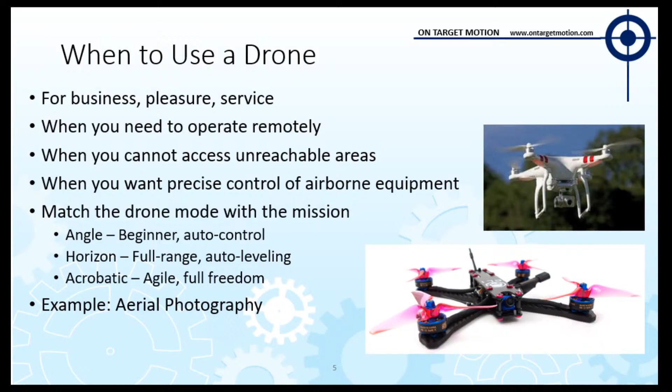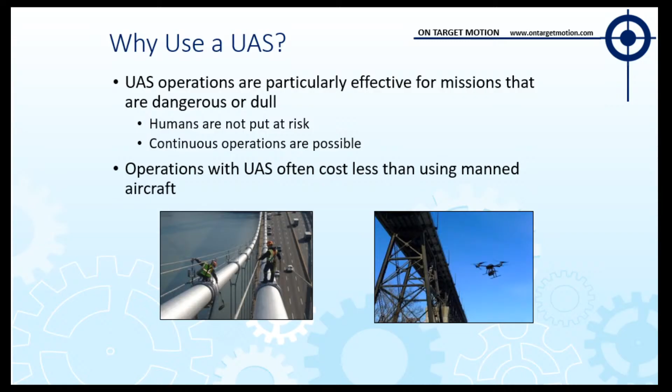So what's inside of an unmanned system? So you'll hear these called drones. You'll hear them called UAVs, or unmanned air vehicles, UASs, which is unmanned air system. Generally, it should be called a UAS. This is a UAV, but to operate it, you need the whole UAS, because you need the system. But what do you need to operate a UAV?

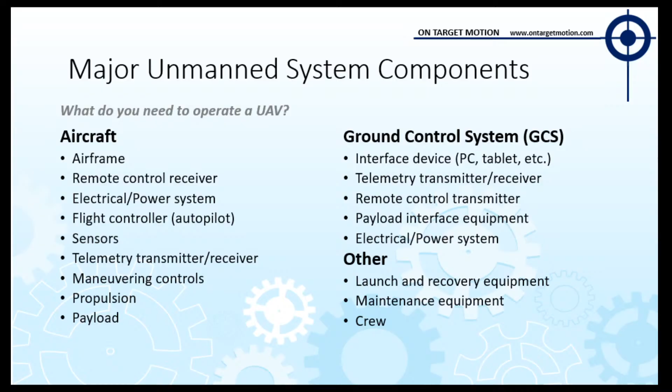Well, you need an airframe, which is this big X frame here. You need a remote control receiver, which is generally these things. I'm sorry, they're the transmitters. The transmitters, the receivers are on the aircraft. The receiver is built into here. I don't even have it on here. The one going around has another piece coming out of here. You need an electrical power system. That's a battery sitting on there.

You need sensors. This guy has ultrasonic sensors on it. Some of them have LiDAR. Some of them have radar even. You need telemetry. If you were out there flying with me, you saw that you could read on the phone the altitude you're at, how far away you are, things like that. The battery voltage, that's telemetry. You need a way to maneuver your controls. Typically, it's with these joysticks.

You need a propulsion system. Usually, that's motors and propellers. Often, you have a payload. In this case, it's the cameras. You need a ground control system. That's usually one of these radios. And on that radio, you'll have some sort of visual system. So the one I was flying, I had an iPhone connected here to give me a visual of what was going on. You have your telemetry, you have your remote control transmitter, things like that. So lots of equipment is needed just to fly this system.

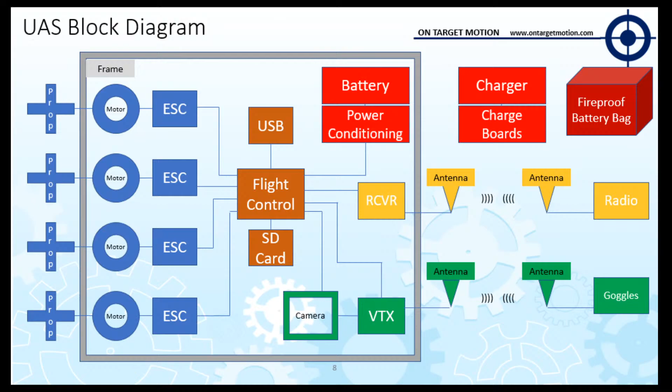In this case, you put these on, and you could fly kind of VR, flying your drone. So you have goggles and such. So that's great. That's good.

So when you're building these drones and you're looking at how to select the one you're using, the mission profile matters, and the payload matters. The payload is really what you're using it for. What's the payload of this drone?

Who can guess what I mean? It's a camera, right? The mission of this drone is to take pictures. So the payload of what it carries around is a camera. Sometimes a payload might be some infrared sensor or a heat sensor or something. There are border security drones that fly around and look for heat signatures because there could be somebody hiding somewhere. Or an Amazon package could be.

And for those that were in our light and laser program, we talked about infrared sensors and how they use it, so there are companies that will go to buildings and say, okay, facilities manager, you've got a leak in this area, and that's a great use of that. Yep. So whatever your payload is, whatever your mission profile is, where you're going to use it, will determine the kind of drone you're using.

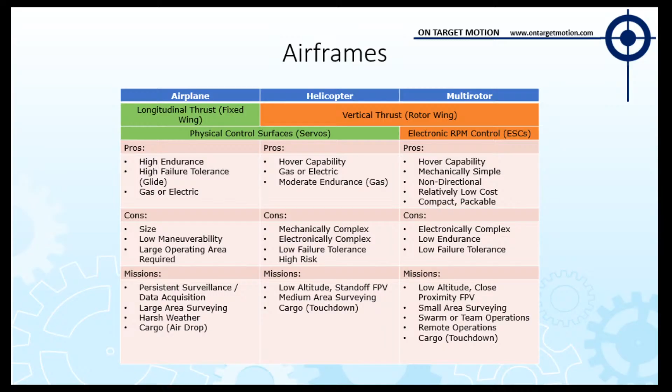Although people are using UAVs, winged UAVs that are like airplanes, to do scanning operations. So you can do a glide camera move as well. So they all have their pros and cons. You pick the airframe that suits you. And then you pick the payload that suits you. Now, there's a whole variety of different cameras you could have there. You can see the kind of features that people care about nowadays. You do need it to be stabilized.

Somebody made a comment out there when we were flying. They picked this up and they moved this around and they said, hey, the camera moves when I do this. And it does, because this camera is on a gimbal. So if you look carefully, it can move in 3 directions. That's because it wants to be level to take the picture, and if the drone moves like this, it has to stay level. So the gimbal has to be able to move the camera in 3D space.

So lots of different configurations. Somebody mentioned the Amazon drone. It doesn't look like this anymore. They have a couple different varieties. I've actually worked with Amazon on it. Let me ask you this. What do you think is the biggest challenge with Amazon delivering packages via drone? Close. It's actually people stealing the drone. If you're going to buy a $12 pack of whatever you're buying on Amazon, but you have a $13,000 drone delivering it, right? They're worried, how do you protect the drones?

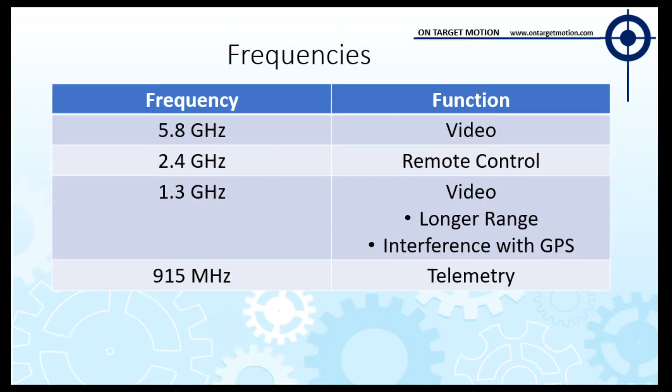Well, the frequencies are chosen based on the bandwidth of the data you're sending. So video has a lot of data, so you need a very high frequency to send that much data that fast. Whereas telemetry is very little data. It's just bits and bytes. You can send that on a very slow frequency. And they're spread out so that you could run all those radio signals at the same time. So these are some of the tools you would use to run it.

These toy drones come with kind of toy remote controls. We have a whole bunch of those. We actually ran a kids workshop with these. We found out that kids are pretty rough on those. We burned a bunch of them. This is a setup we use for the Build-A-Drone program. That's why I have this Taranis radio. This is from that Build-A-Drone program. That's from our drone operator course. That's these Phantoms and the radios that come with that. And then the Mavics are for our application courses. So we've been running with that as well.

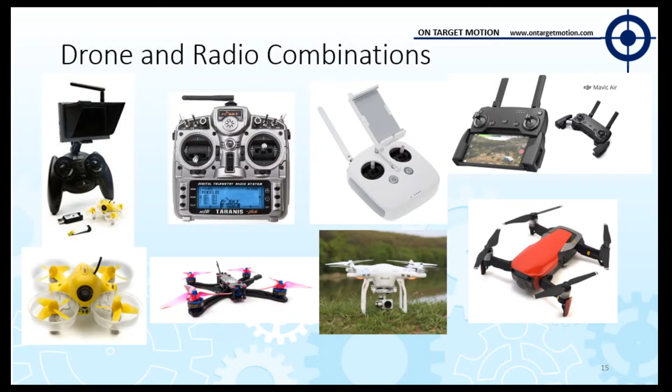Now these remote control systems, that's your connection to the aircraft. So it consists of the transmitter and the receiver that's on the aircraft. The green one still going around somewhere? Oh, it's right here. You guys all saw this? Okay. So it kind of looks like a bug with these antennas, so it's often hard to see. But this is actually the back of it. The camera's the front, right? Because that's what you're out there doing.

But this has a couple of different transceivers on it, right? This one is for your video, and this one's for your remote control and your telemetry. So a couple of different transmitters and receivers on it. This is a transmitter because it sends the data to you. This is a receiver, but it's also a transceiver because it needs to send the telemetry back to you.

There's multiple channels on it because if you had a bunch of guys out there on a drone field running, you don't want to step on each other. So these radios generally have ways to change your channels, and you can program these to do all kinds of different things. This looks like old technology compared to some of these, right? But this radio is phenomenal. This can do everything you'd ever want. You could program it to set up for different drones. I could set this up for this drone and tune this drone different than that one, and then pick the different drones I want to use. This is an amazing piece of equipment.

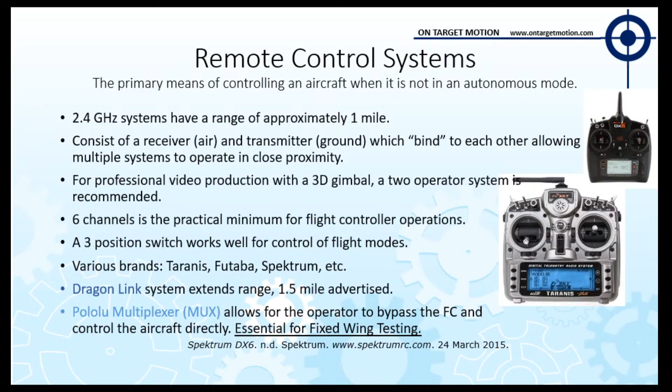When it comes to batteries, I use these LiPo batteries. Everybody generally has their own kind they like for each drone. They're generally proprietary for these commercial drones. So this is a DJI battery. And if you look at a commercial drone, about a third of the cost is the drone, about a third of the cost is the camera, and about a third of the cost is the battery. The battery is a very expensive component because they know you're going to buy a bunch of them. And generally, battery technology is pretty expensive. But these guys right here are just commercial batteries you can buy for a couple bucks. So these are the ones I use on these builder drones.

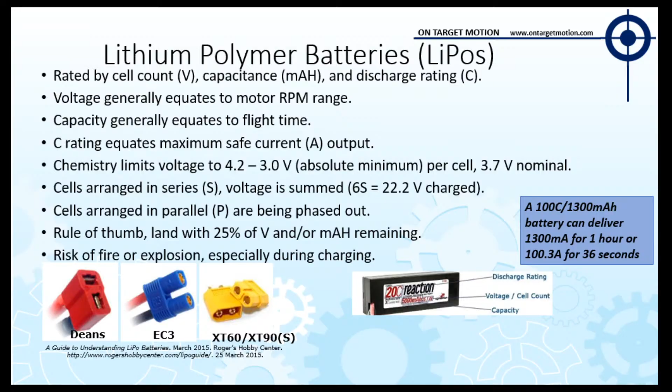The funny thing is, these ones don't get much flight time. I probably get about 5 minutes of flight out of this drone with this battery, whereas this guy I get about 20 minutes of flight. I also fly this one a lot rougher, so that's part of it. But a lot of it depends on the chemistry and the stack up of the battery. So you can see some of that detail there. When it comes to the motors, different motors give you different performance. These are brushed motors.

These are brushless motors. A lot of that depends on the kind of drive you want to use, but you select the motor for the multi-copter you're using. So there are two drivers for the size of the motor. One of them is the weight of the aircraft, because as you can see here, the thrust you need to get out of a motor depends on the weight of the aircraft, some safety factor you put in for it, and then the number of motors you have. Not everybody has 4 motors, some have more or less.

But then the other thing is how fast do you need it to accelerate. So these motors are actually pretty strong relative to this one. This Mavic has these little tiny dinky motors, whereas this one has these bulkier motors because I want more power out of this one. This is a racing drone, so I need a lot of acceleration.

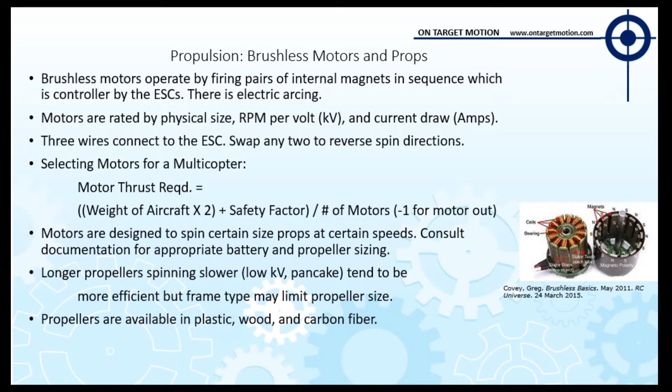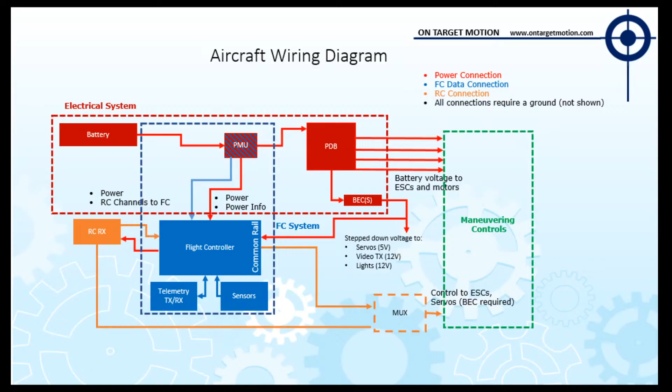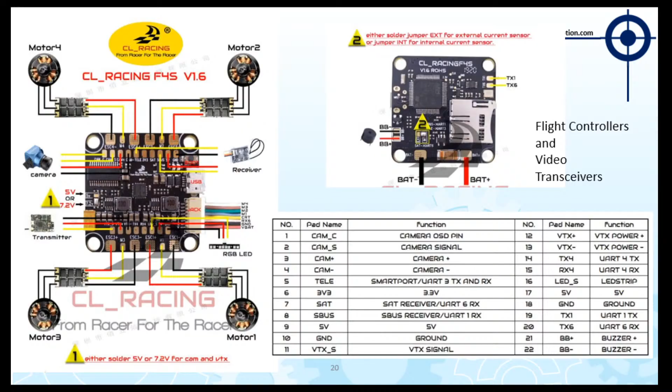These are the actual parts that we put into these builder drones: the flight controller and the video transceiver. And you can see there's a good number of wires, but not overwhelming. On the flight control, most of the wires go out to these ESCs and then to the motor. So we just solder them up. 3 wires there, tape the ESC down, 3 wires out to the motor. Piece of cake to put those together, but that's kind of how we build those racing drones.

Now when you get to the camera, there's a couple of choices you could have. Generally we use these little tiny board level cameras that you see right here because they're cheap and they're good for FPV. You kind of keep them at a fixed location. But when you get on these commercial drones, you're investing pretty heavily in that camera because that's what this drone does, right? The purpose of this drone living is to take pictures. So you invest in getting a real good camera there. So you could use GoPros, you could use bulk cameras like that.

But what I want to show here is, if you want to walk into Best Buy, where would you go to find a drone? You'd go to the camera section. Because they don't call this a toy, right? They call this a camera that flies. It's not a drone that has a camera. It's a camera that flies. So most of these electronic stores treat them as cameras because it is the most important part of what you have. I mentioned the gimbal and some other challenges with cameras there.

And when you tie these into a first-person view system, you need a video switch to go from your display to your goggles if you're running with goggles. And this is an old set of goggles. Most goggles now don't have this big box on the end of it. They're real compact. But you'd put antennas on it here. I don't have the antennas on it, but these are your user interfaces. You press the buttons you need to tune into the right channel.

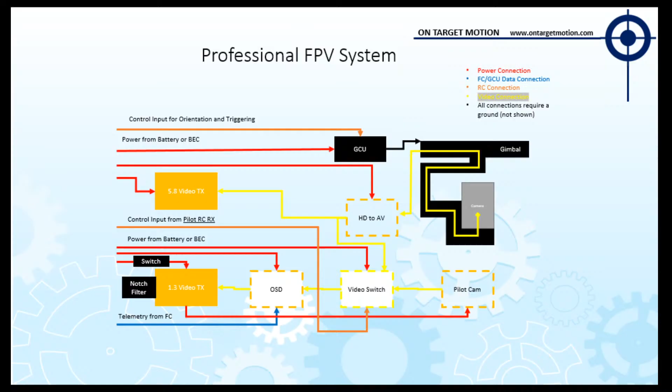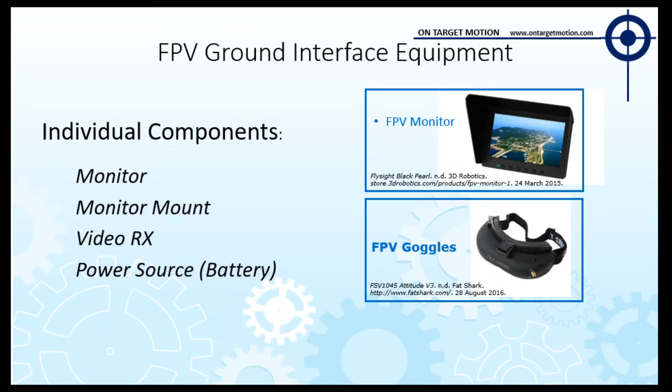By the way, if you were to fly with goggles, by regulation you still need somebody to have visual line of sight on the drone. You can't fly goggles alone by rule. So there's some FPV goggles. The other thing a lot of people do is they take an FPV monitor, which I was using with my phone. Sometimes put a shade around it to keep the glare off. But that's how you'd have your visual interface.

So let me talk about some flight dynamics here. You saw these drones going around. If you were to pick up a control like this, some of these I showed out there, this is a mode 2 control. So your left stick has two functions. It is your elevation. You push up or down as your throttle up or down. That's going to raise and lower the drone. And then the yaw is left and right on the left stick, and that's going to turn it.

So you would take your drone, and if I push the left stick up, the drone does this. I push it down, it does this. I push it left, it turns this way. Push it right, it turns this way. On the right stick, you can see it has your pitch up and down and your roll left and right.

So if I pitch it up, it's going to actually go backwards because it's going to pitch this way and go this way. If I pitch it down, which is pushing the stick up, it's going to go forward. And rolling, roll left or roll right. So the right stick is how you move it along the horizontal plane, right? And your left stick is how you move it along the vertical plane. Make sense?

So let me ask you this. This is where it gets a little funky. How does the drone move left, right, forward, or back? By tipping? How do you tip a drone? Because remember, the only thing you have as a pilot is this, right? I have a couple of joysticks, that's it.

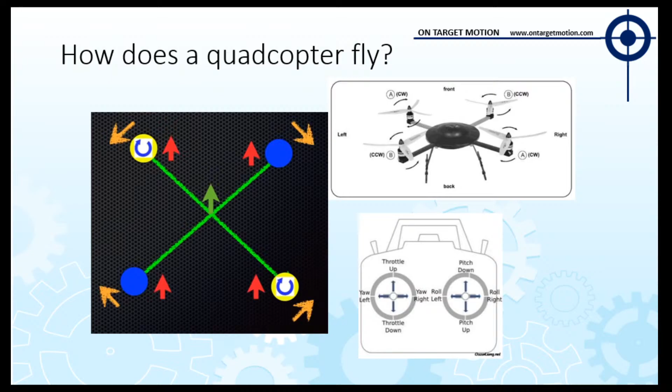So the flight control, we talked a lot about the flight controller.

How am I doing on time, Drew? What time is it? Okay.

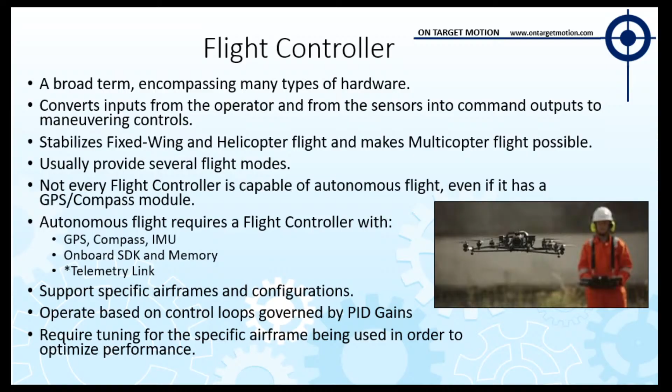All right, so when we get to flight controllers, there's the way you tune a drone. The most fun part of these drones is tuning them. When you build this, the first time you power it up, it's going to crash on you. I tell everybody that when we build them, because I don't want them to get upset. But the first time you fly it, it's going to crash. And the reason is you haven't tuned the flight controller.

The flight controller doesn't know the weight of the aircraft, and that's going to change depending on the kind of batteries you choose, depending on all these design choices you made. It doesn't know, I mean, you've got to tune the angle of your camera. This camera right here is too loose. I need to tighten that.

Or else you won't be able to see where it's going, because when this flies forward, it's going to be tilted. So I needed to tilt that up. If it was tilted down here, you're going to see the ground. You're not going to see where you're going.

But the flight control doesn't know the weight of everything. It doesn't know the performance of each motor. So it doesn't know how fast it should be spinning all these things to do what you want. So in a flight controller, we call it a PID controller. And there are gains that we adjust so that when you give it a commanded state, it's going to read the sensors of where it is, determine an offset.

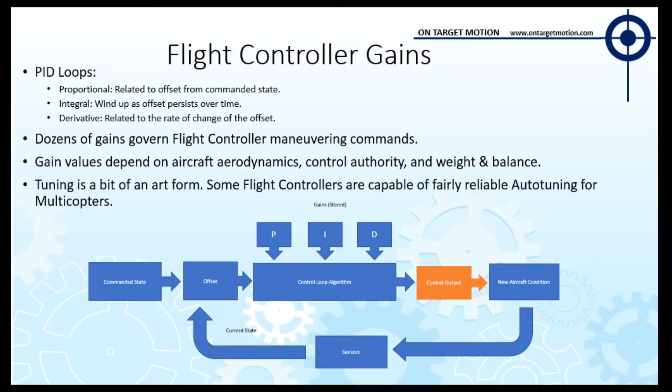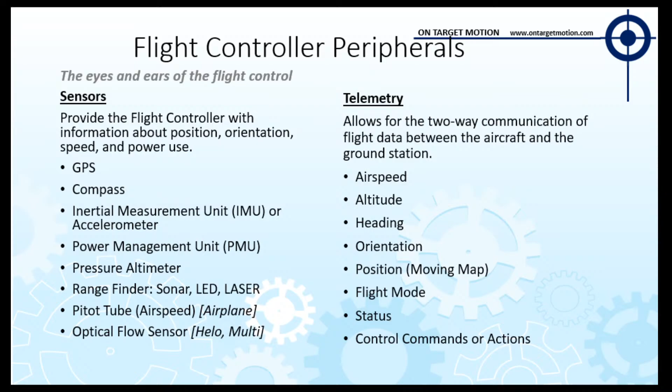We've talked about the different flight control peripherals, all the different things you can have, GPS and compass, all these different sensors on your system, the different telemetry data that you might end up having. I had a conversation outside with some folks about what it means to have a flight crew. And when it comes to a drone or a UAS flight operations crew, there's actually several roles.

Doesn't care about anybody else. This guy bears all the responsibility of everything going on out there. But he's the guy who has to manage this whole team. There's going to be a person manipulating the controls, or the PMC. There's going to be a ground control system, which is usually your radio, but that's whatever is communicating to the drone. Sometimes that's an entire room full of computers.

There's a payload operator. Often the person controlling the drone or the UAV is different than the person controlling the payload. Where would that be the case? Think of some applications where that would happen. Military would be one, right?

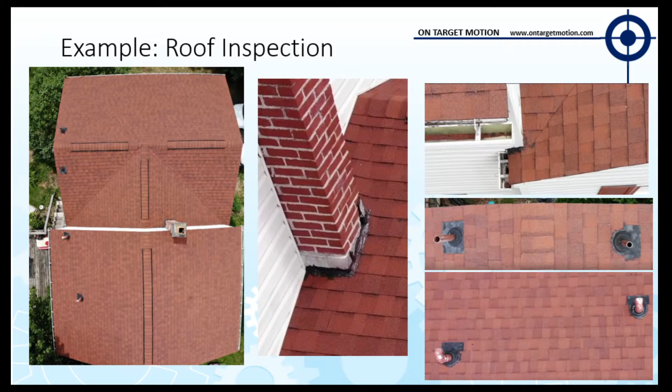I said, what's all this? Are you missing shingles? But apparently that's the way you do it. You got to tar outside that stuff. But I don't know. I'm not a roofer. If any of you guys are a roofer and you tell me that's bad, let me know. But he assured me it was good. But I was most concerned about this area here because that's where we were getting water.

The big area where we're seeing a lot of money flowing right now is agriculture. They're using drones to do not just visuals, but to spray pesticides. They're using drones to actually take action on the crops. So I think it's pretty interesting because that's where they're seeing a lot of the money going.

Yeah, so you think about if you're spraying chemicals onto your plants, fluid's what, 10 pounds a gallon roughly, right? So if you're taking a bunch of gallons out doing that, that's a pretty heavy payload.

As I recall, some of those displays at the most recent Olympics, those aerial displays in the beginning and at the end. Oh yeah, where they showed the Earth. Are all drones. Yeah, that was. I think what did I hear? Was it either 800 or 1800? I can't remember, but it was hundreds and hundreds of drones doing that.

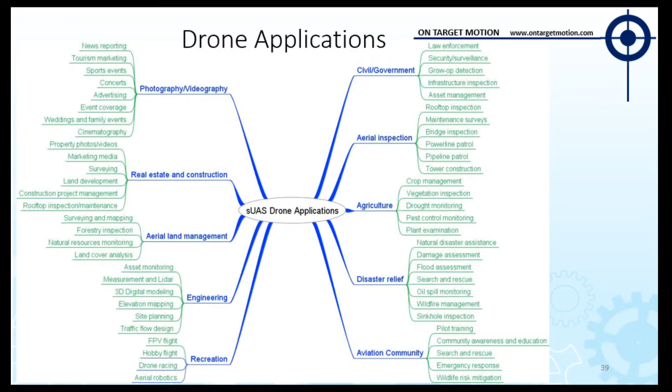Yeah. You're right. That was a fantastic show. If you haven't seen that, by the way, Google the Tokyo opening ceremony, and it was a shame that there weren't more people there to see it, but it was pretty fascinating what they did with those drones.

I'm not going to get into the nefarious uses because I'm not going to condone that kind of behavior, but I will list that people are using drones for bad reasons, which is one of the reasons the FAA has to be so restrictive on use. Because it's not just us taking pictures of our grandkids or us inspecting cell phone towers. It's people who are doing bad things. People have delivered drugs on drones. The thing with doing that is there's no line of sight back to the person who's controlling it, and that's the hard part.

For me, if you're doing this the right way, you take your drone, you register your drone, and when you register it, you put your registration information on the drone. So if I ever did something wrong and this drone crashed into something and a police officer picks it up, he could track me down because my information's on the drone. Bad guys, of course, don't do that. So that's one of the challenges we have with drones.

And one of the applications for drones for good guys is called countermeasures or counter drone technology. And we're working on technologies to defeat these kind of nefarious activities. There's entire businesses on how do you stop a drone that's rogue? How do you stop a drone that's out doing bad things? And there's plenty of opportunity for that.

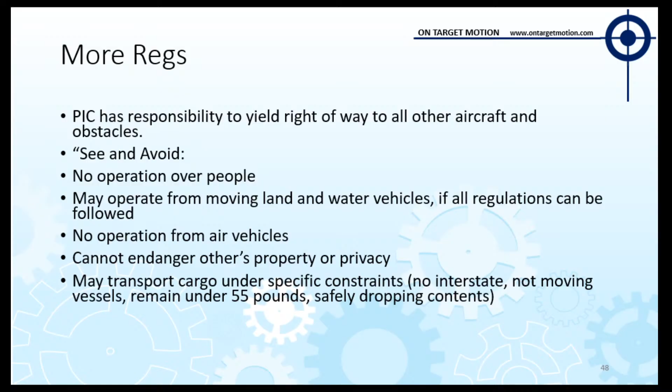If you looked up knowbeforeyoufly.org, you'd see all of these. You have to yield right of way to other aircraft, other pedestrians, things like that. You can't drink and fly. Lots of regulations. I'm not going to go into all of them unless you're interested. But I did want to show the wedding cake picture. FAA Part 107 is the license you have to get to fly commercially for drones.

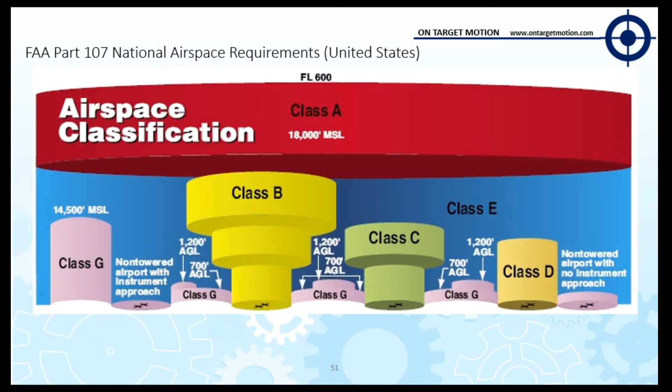So I mentioned that I spend a lot of time working with the FAA on the national airspace. And how do we integrate into the national airspace? Because what's happening is there are more and more applications that are becoming mainstream. And the FAA realizes we have to get them in there. So we want to get them in, but we have to get them in safe. So we're looking at a variety of ways to do that.

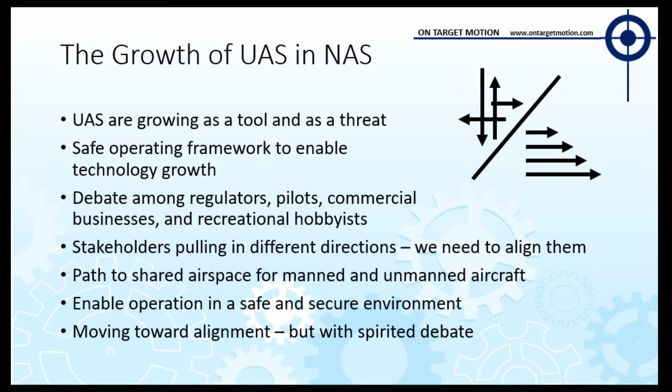There's a lot of debate going on between the regulators and the pilots and the recreational hobbyists. We're trying to find a way to get there. It's going slow, but I do want to say the FAA does have our best interest. What we need to do is instead of fight, we need to get aligned and work on our path forward. And one of the ways to do that is drone technology.

Drone technology is growing, and the sensors on the aircraft are getting fantastic. So you could sense a lot of information and perceive the world around you. And the processing in here is allowing you to think and evaluate and coordinate and decide. And then the actuation on this allows you to act and move and respond and execute. So the sense, think, act cycle is getting more and more precise.

And I would argue that it's very difficult to say that you need to have somebody piloting an aircraft to have the same level of situational awareness and control. And that's been the big hurdle, because if you think about a piloted aircraft, you have a pilot in the cockpit that can see everything and can act on the aircraft. The FAA doesn't believe that a remote pilot has that same situational awareness or control. And that's the argument we're trying to get to.

So the policy is growing, but technology is moving faster than the policy. And that's actually been a blessing and a struggle at the same time. The applications are stretching the regulations. We need policies that evolve and maybe leverage all of this new technology we have growing. FAA has taken some great steps in the right direction. This is one of them.

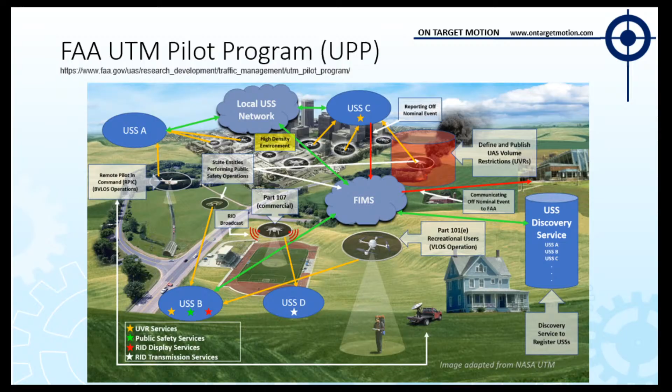They have the UTM Pilot program, where they're looking at how to use the drone pilots to coordinate with the rest of the FAA national airspace. And it could be everything from one guy running a drone here, but he has to talk to an entire airport worth of data going on, the whole USS network, your FIMS, all of these different areas that are out there that we need to talk with. So from a drone technology standpoint, this drone technology is growing. We're getting more and more capabilities to the average user.

I remember the first aircraft I flew was a little model plane. It took me forever to build that thing. It was a little model kit I had as a kid. I flew it and had no idea how to control it. I crashed it into the house, and that was the end of my airplane, right? It took me longer to build it than I ever owned the darn thing.

Now you can buy these commercial ones that have far more capability than anything we've ever had. And it's easier than ever to fly it. Some of you guys were able to fly with me today. You saw it's not that hard to get control, and especially the fact that you could let go of the control and it would hover is fantastic. So kids now can fly these drones right out of the box, which is fantastic. And because of that, everybody's doing it, so applications are coming that we haven't even thought of yet.

My daughter had a drone deliver her coffee once. It was a $30 coffee, but she can tell everybody that a drone delivered her coffee. So all kinds of applications are coming. The regulations have to keep evolving for safe use and freedoms for everybody creating those applications.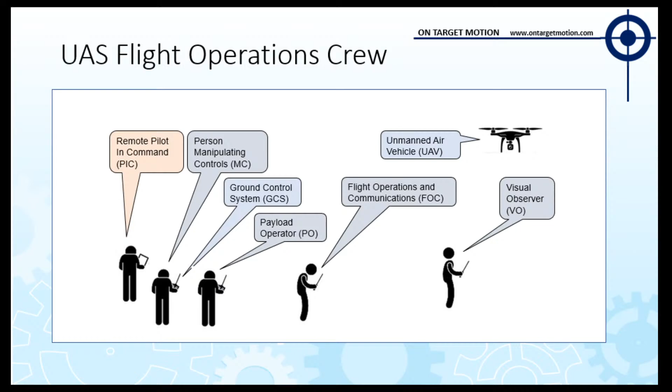And the question was about commercial. Yeah. When do you need a permit or a license for something other than commercial purposes? So today, to be a hobbyist, you can go fly this around your backyard without a license. So if I'm just taking pictures because I think it's fun, or if I want to build a racing drone and go race it around the woods, I can do that without a license. The minute I become a commercial operator is when I start accepting money for what I'm doing. So if I took pictures and sold them, I'd have to. That's a commercial use. So right, the minute you use it for commercial.

So like I've seen drone racers that really scream around various places. I'm assuming those people, they may not be paid for it, but something like that, you'd have to be licensed. Yeah, generally it should be licensed. By the way, getting a license is not a bad thing. It helps you be a safer and more knowledgeable operator.

We did a drone program, I mentioned to you guys. We did a drone operator course. We charged $25 for it, and it was 6 weeks for the course. And they used these drones, and it was hands-on. It was 25 hours of classroom, 25 hours of field work, and they all got drone licenses at the end. The fastest I've seen somebody get a drone license is one afternoon, where he decided he was going to get it, he made his appointment, he read the book, he went and took the test and passed. So it's not terribly hard to get your license.

I'm convinced it's a way for the FAA to track you better, right? Because you're going to get a license, you're going to be registered, all your drones are going to be registered. I think the FAA really likes the fact that I register these drones. The FAA knows everything about this drone that they need to. So I think it's good overall for the community to be licensed. All right. Any other questions?

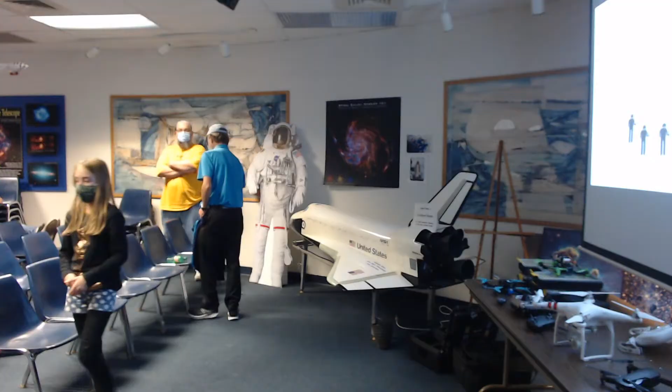I haven't been out recently, but when I was out, Jupiter and Saturn were beautifully in our southwestern sky. I know the moon is set, so we should be able to even see the Milky Way. So we've got at least one scope in the yard, which is actually our special scope that we purchased that is wheelchair accessible. Not that anyone is here with a wheelchair tonight, but you can check that out. But also check out our 6-inch and our 14-inch. We'll have at least those two objects, and we may be able to even look at some galaxies and globular clusters afterwards. So thank you again for coming.

Thanks, Drew. So, is it going to take like a terrorist drone incident to get the FAA to